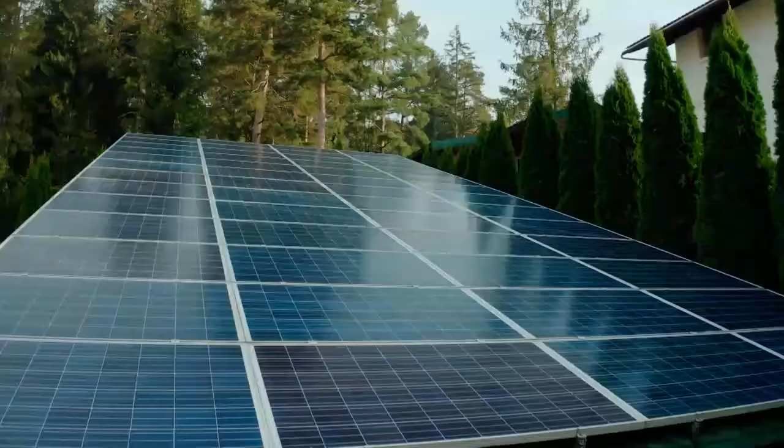This is a key project to reinforce construction in Chile, and it is a very important initiative to encourage the different construction systems in terms of infrastructure. We trust that our alliance will push every new company in the market so that the country can move forward to sustainable solutions. These kind of initiatives are necessary to progress towards a zero emissions economy. This is why I wish you the best of success with this innovation park.

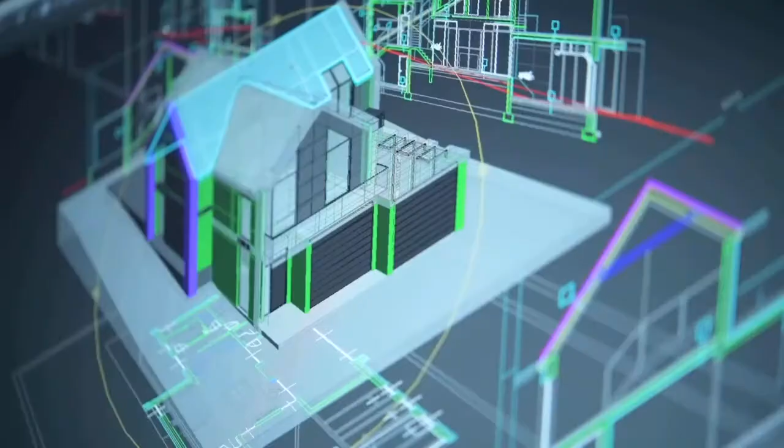As rector of the university, we are part of this initiative, and from the south of Chile we are ready to start this piloting in the university that will boost constructions in the southern part of the country. The combination of the expertise of academy and the connection with the environment and its needs, adding to the active collaboration of the main agents from the region in the sector, will open growth possibilities to innovations, always with a local point of view, because from regions we have a great contribution for the development of the country that everyone yearns and needs.

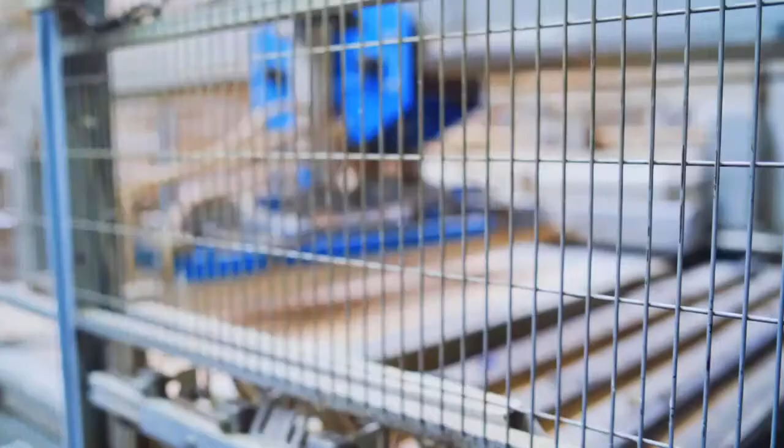One of the keys for the development of the future of this activity is application of technology. We need to manage to use these progresses focusing on our human capital. This is why it's a thrill to attend this launch. Without a doubt, this innovation park will mark an important landmark in the future of construction.

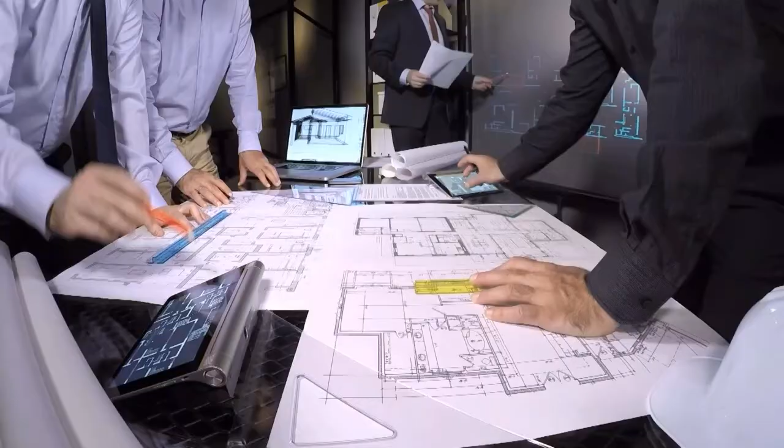As the Chilean Construction Chamber, we look for new spaces for innovations like this park. We hope that this is just the beginning and that many other companies can join this alliance. We are very proud to be a part of this space, and we hope that from now on this initiative will potentiate construction. Congratulations on this landmark, and let's hope that this is a space for dialogue and creativity that will remain in time.

Muchas gracias por sus palabras. Thank you very much for your words.

Pablo Terrazas, the British ambassador, the rector of the University of La Frontera, and the president of the Chilean Chamber of Construction. We would also like to welcome Francisco Martinez, Dean of the Mathematical Sciences from the university, that has just joined us in this launch.

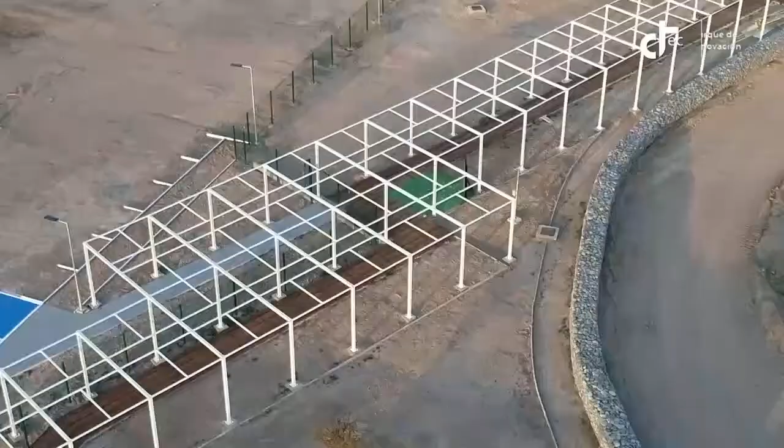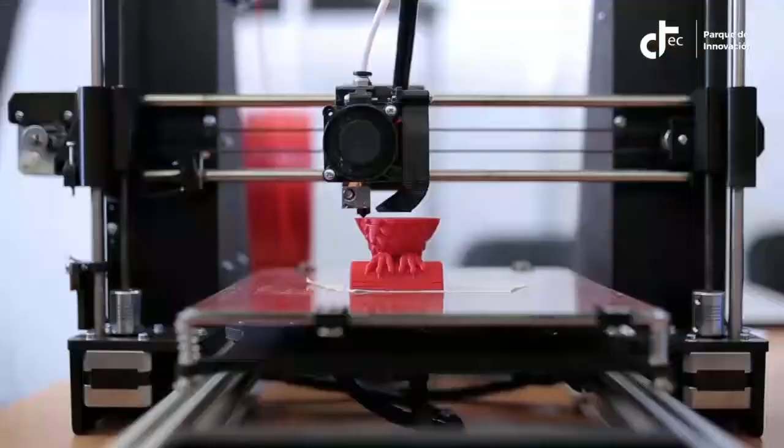If we want to change the way of building and living in the cities, we need innovation. Innovation doesn't come by itself, it's part of a collaborative group.

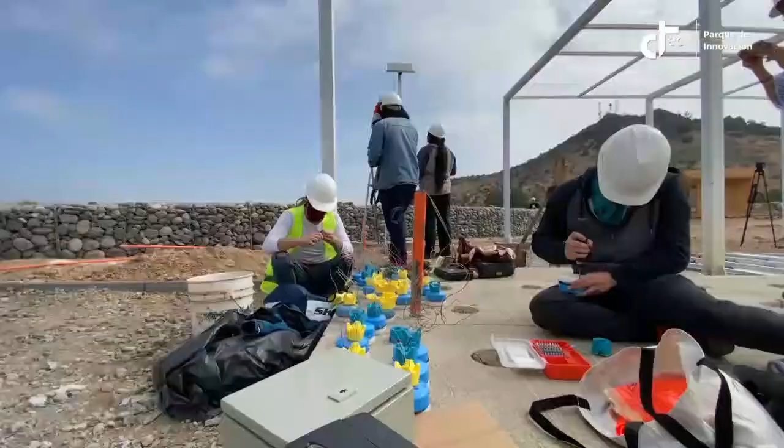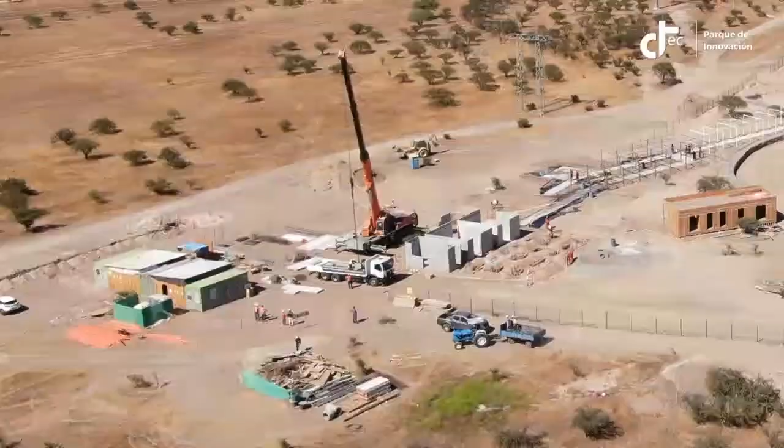We are very happy to put this park at your disposal. This is a place of meeting and construction where top-of-the-edge technologies will converge.

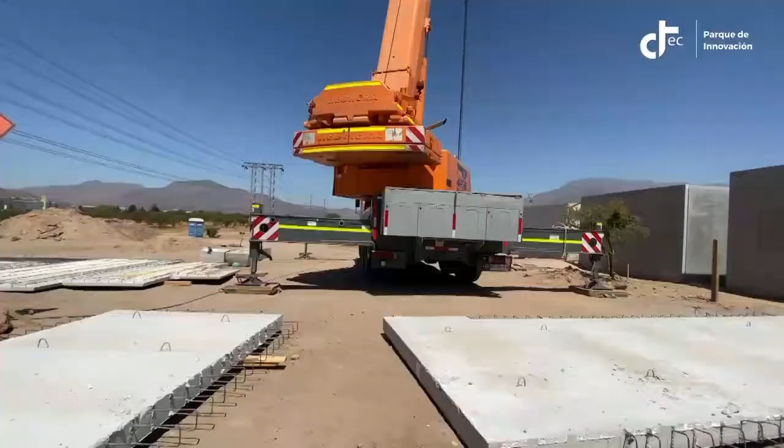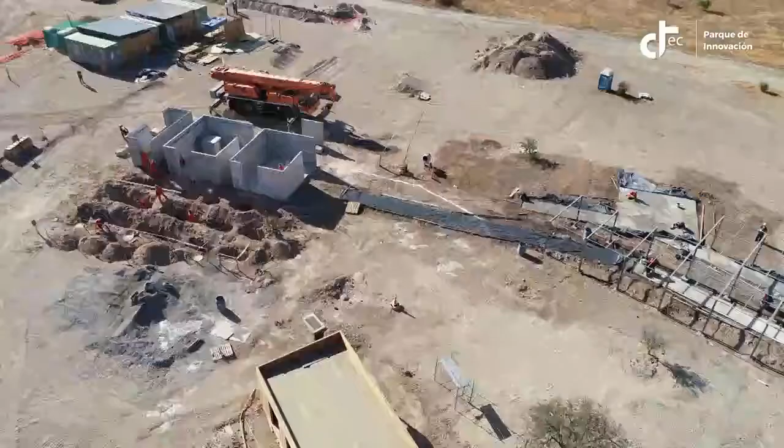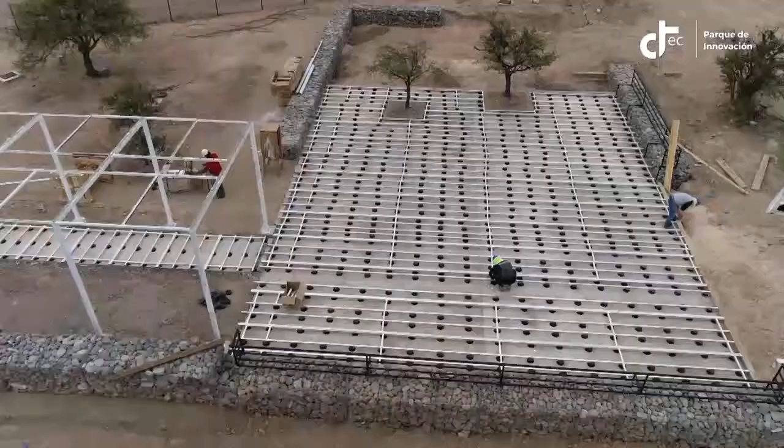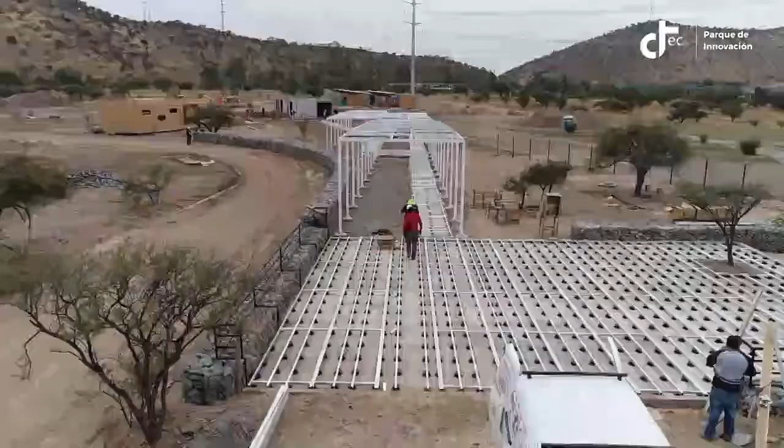Here, companies can do pilots, monitor and test, validate different solutions, new materials or new processes in an integrated way. What we want to do is improve construction systems, incorporating new technologies and innovating in the processes. This is very important to maintain a more efficient construction. Construction, as many other sectors, needs to adapt in light of technological improvements, trends, and better managing of energy and any other relevant aspect that can be tested here in this park.

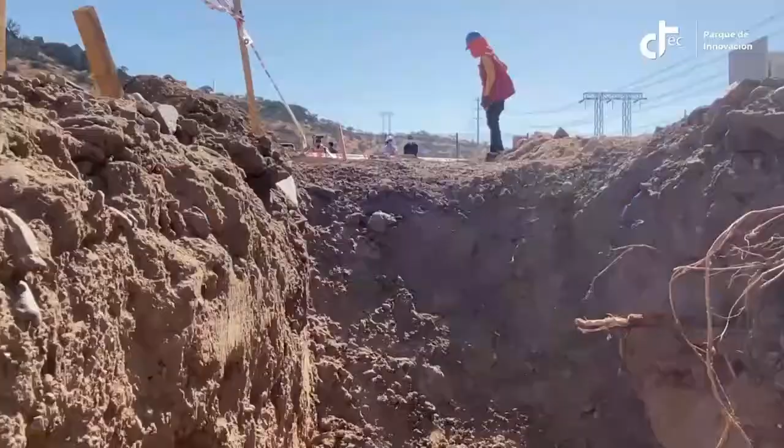This CTeC project is a great example because every protagonist is combined: universities, the government, private companies, and international entities. They are the protagonists that we want to invite.

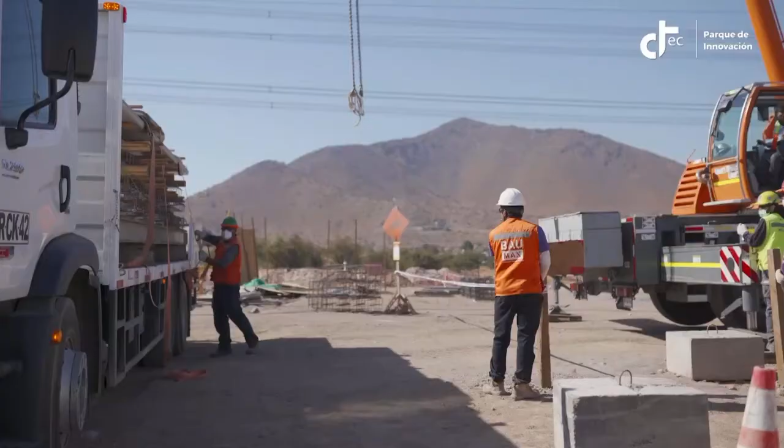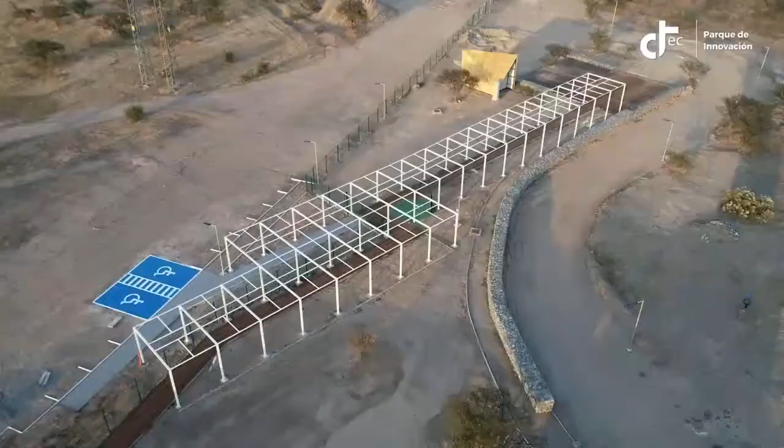The Innovation Park of the CTeC is inspired by the idea to generate instances of collaboration between companies. Here's a mix of solutions. We have more history, but we also have other solutions with different startups and new entrepreneurs that we have a chance to test and try out.

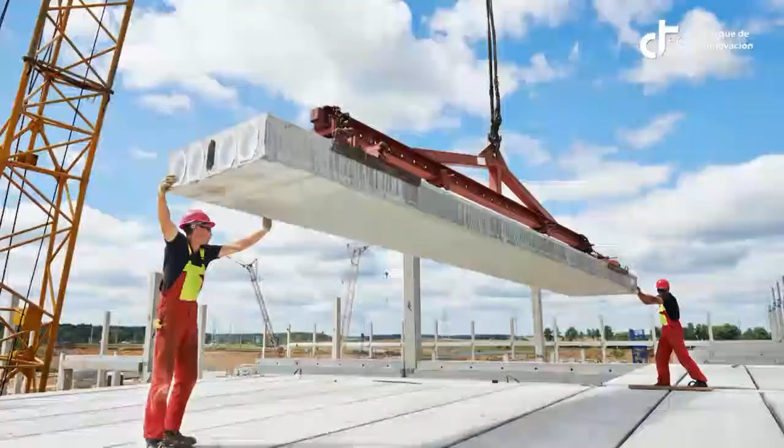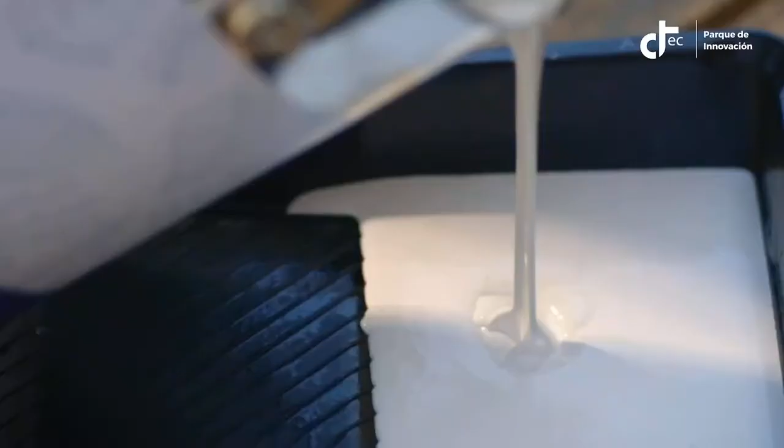The park will allow the development of many products on a national level, developed here in the country. When we have initiatives like this in one place, you can see innovation, connect with the company, and bring knowledge, which allows gaining more visibility on this sector that is strongly growing, and hopefully every company can take advantage of. We invite you to be a part of this change of the industry, and this is the best place to do it: our Innovation Park.

Through the Innovation Park, CTeC seeks to shift the paradigm, driving collaboration and innovation of different stakeholders regarding building. It presents an opportunity and an invitation to rethink the way we're working on projects, with the aim of making processes more efficient and obtaining better results in terms of productivity and sustainability.

To know what the Innovation Park is about in depth, the associated services, and the opportunity it represents for companies in the sector, I'd like to leave you with Carolina Briones. Carolina is an architect from Universidad de Chile, expert in implementation of BIM methodologies, and currently executive director of CTeC. Please go ahead, Carolina. Thank you very much, Jess.

Thank you to all the authorities present today and to the attendees today. As the rector and Provost just mentioned, it is a very important day for us, and I'd like to convey how pleased we are, everyone that is connected today on the day of launching the park. I'd like to also thank the entire team of CTeC that has worked on this, who may not be visible on screen today, but for their great effort, along with everyone who has seen the value of the park and who has collaborated for us to be present today.

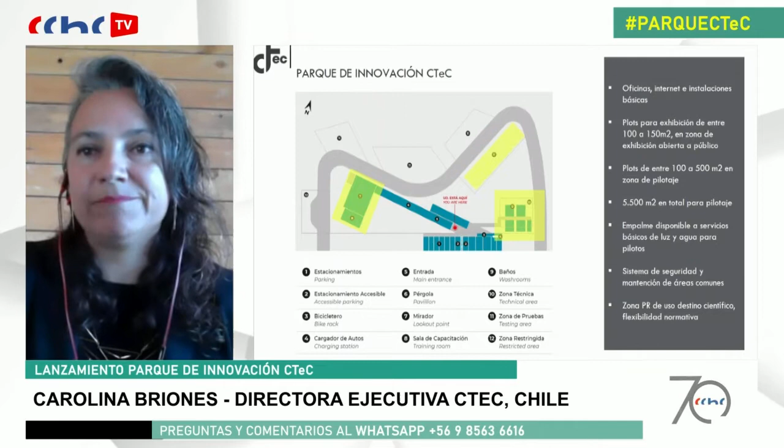How will CTeC accompany the companies that are part of the park? We're offering a service and accompanying them in prototyping and piloting of solutions at real scale and in real environmental conditions. As CTeC, we will offer services to sensor this and measure everything, to see if they have hygrothermal, acoustic conditions, everything in place.

We will generate reports, and we currently have the privilege of telling you that we have a follow-up platform developed together with a member company, Velocity, which allows us to follow in real time the sensors and reportability of what we're measuring in our pilots. This is the first digital twins platform here in Chile. Everything will be sensored through artificial intelligence, and in real time we'll be able to see the performance.

In addition, CTeC and the Innovation Park will offer instances for showing annual events, where technicians and professionals can visit and showcase technological solutions. We will also be producing training to the extent the customer needs, because it's that important. One of the gaps detected is the need to strengthen the capacities of labor, technicians, and professionals regarding these new disruptive technologies, industrialization processes, and all the new processes we need in our labor.

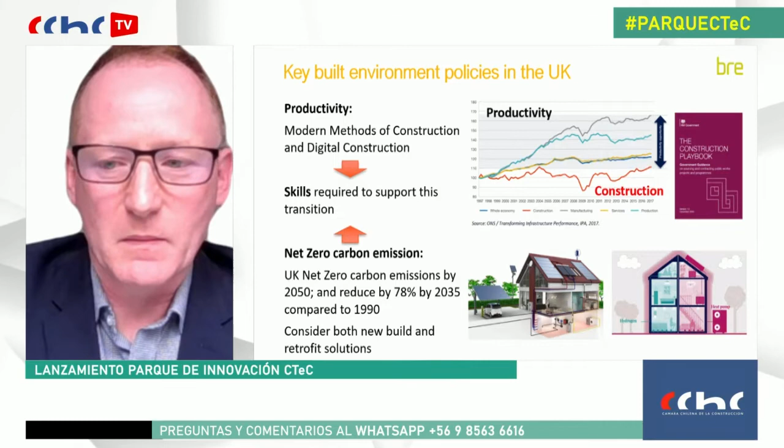I'm just trying to share the second slide for a moment. Sorry, my screen isn't moving. I'm just going to try and change. Don't worry, we'll wait for you, Martin. Okay, 1 second.

Apologies for the delay. The Construction Innovation Hub is an example of a significant UK government programme to improve productivity and also quality and better environmental and social outcomes.

BRE is one of the partners on this programme, together with the Manufacturing Technology Centre and the Centre for Digital Built Britain in the UK. The programme will help provide better performance outcomes through value-based decision-making. This will help optimise the outcomes rather than focusing on the lowest cost solution, as is often the case.

Advanced manufacturing methods are being used to develop a more standardised kit of parts that can be reconfigured for different building types. At present, there are many different approaches to off-site manufacturing, and the lack of standardization makes these solutions difficult to deliver at scale.

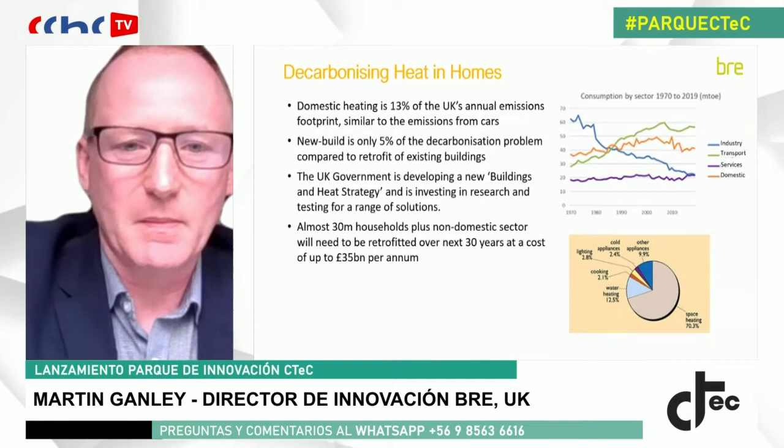Thank you very much, Martin. The truth is that it's quite impressive, all the advances, the focus you have, your approaches. I believe that one of the key concepts you showed today has to do with standardization, and I believe that's one of the actions we will conduct with many initiatives: to standardize the way of working. Thank you very much. Definitely, we will.

We will continue with our second guest, Laura Tordera, leader of innovation at Ferrovial Construction. We're pleased to have a woman invited to our panel today, showing proudly how representativity of women is growing in the business. She's responsible for corporate strategy in the area of innovation for the different geographical areas where Ferrovial works in the construction industry. We've known her way of operating closely, and we've seen the innovation of Ferrovial at an international level, because we know the projects in Chile and we work with you.

We know that historically you've had a close relationship with an international partner like Tecnalia. Could you maybe tell us, Laura, the benefits you've been able to capture throughout these years in this public-private relationship between Tecnalia and Ferrovial, and how a company like yours can reap the benefits of receiving the accompaniment of a technological center such as our center here in Chile.

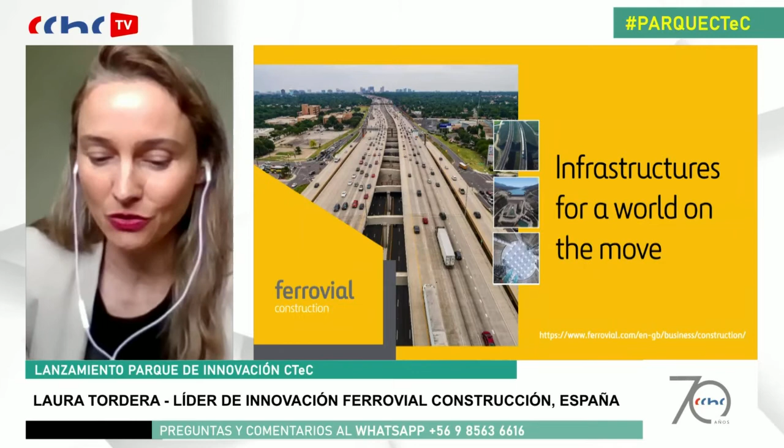Regarding the question you asked me about our collaboration, for example with Tecnalia: this collaboration is part of our open innovation strategy, which has been commented on, and it's the idea you have for your park. For us, collaboration through open innovation is critical because we work with the best specialists in each area we want to develop. It's critical to have collaboration with different stakeholders in the construction ecosystem. I believe the park can be a great opportunity to strengthen these collaborations and drive them between different entities.

Regarding Tecnalia, it's one of the most important technological centers in Europe, and for us it's a fundamental partner in the development of all our initiatives. We have a very close relationship with them and collaborate on different initiatives. We have projects with many more partners funded by public entities, and we have individual projects and developments we want to conduct within Ferrovial, where they help us. We have technical issues at our work sites that we don't know how to solve, and then we go along with Tecnalia. We also do market studies and state-of-the-art research.

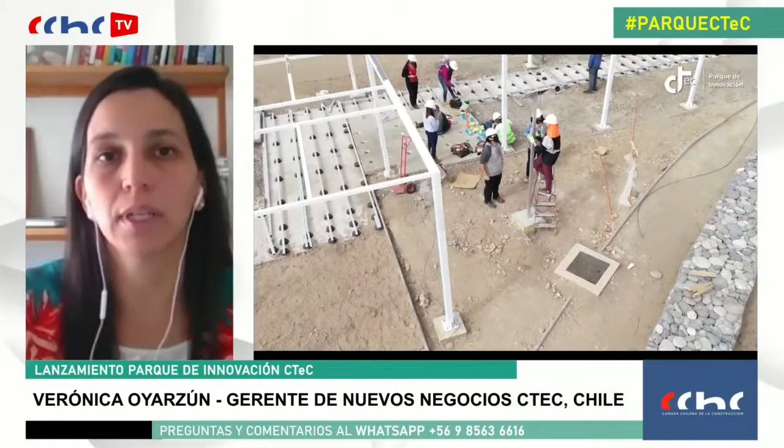We're also watching the example of the house of water. This is a house from a construction company, and they asked, what if we tested what happens with thermal inertia in a dwelling when incorporating water into our panels? We did the whole accompanying process, first testing in the laboratory, and then we moved this to the park.

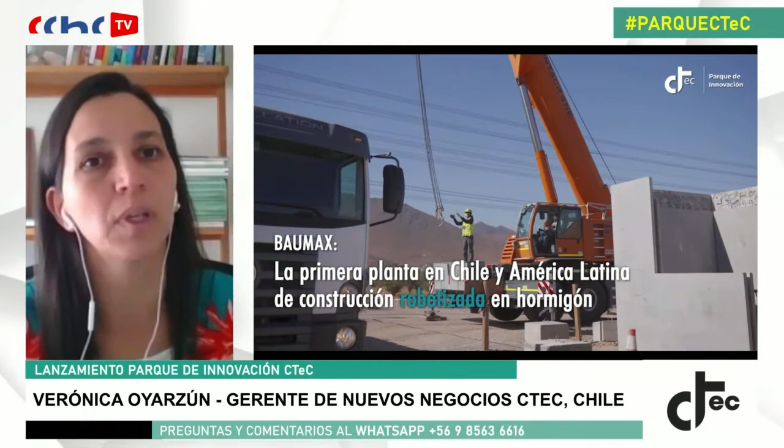We finished the sensoring in two weeks. We gave the first report on how we can improve the thermal conditioning inside, having a curve with a peak temperature outside of 30, lower of 5. Inside, we never increased beyond 25 degrees, and we never went lower than 15 degrees.

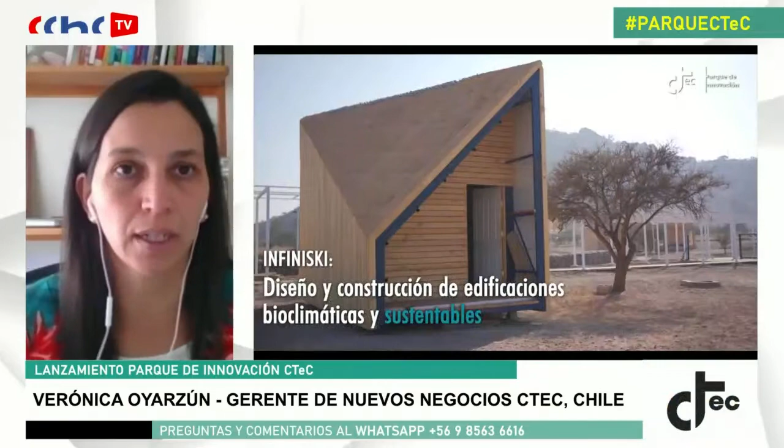So now we're looking at other analyses that we could make, and we're going to progress with them throughout a whole year that we expect to have at the park.

The other example that we can watch on the video is the Baumax case. This is a national company, one of the first in robotics and prefabricating systems. With them, we saw the opportunity of testing different solutions that they were already considering as an option, but clearly they could not test on site.

So here we tested different unions, different matchings, different solutions, different foundations, and also different configurations of the tiles. We realized, and they realized during the design process, that some weren't possible, so they were discarded. Others were tested on the field, on site, but maybe weren't ideal to put in a facility. So this was an experiment in our own facilities, and they gathered knowledge and learnings.

We have tech ideas in companies that recycle polyethylene. It's a huge residual material from construction sites, and we are building parking lots for the park with that.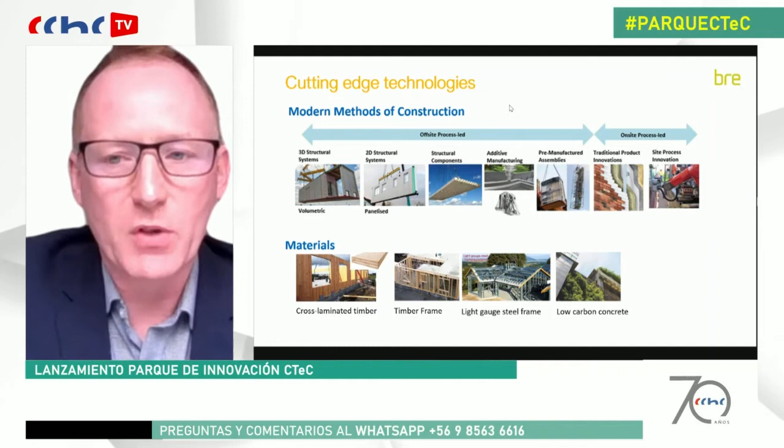Volumetric construction uses three-dimensional structural systems which have been produced in controlled factory conditions. These volumetric units can be brought to the construction site in different forms, including just a basic structure, or including external finishes and services already installed.

Panelized or 2D construction uses flat panel units for basic floor, wall, and roof structures, which are assembled on site. There are also other approaches such as additive manufacturing or 3D printing, and improvements to traditional on-site methods and processes.

There are many innovations in the use of materials also. Timber can help improve sustainability and can be used for timber frame buildings, for example. Its strength can be increased through the use of cross-laminated timber, and sustainability can be further improved where locally grown timber is used.

Some buildings use light gauge steel frames for residential and light commercial structures. Its lightweight nature means it can be transported to site easily and can help reduce the load on foundations and reduce carbon use.

There has been considerable research and development to create low carbon concrete, as this is still a very useful material, but traditionally has a high carbon content.

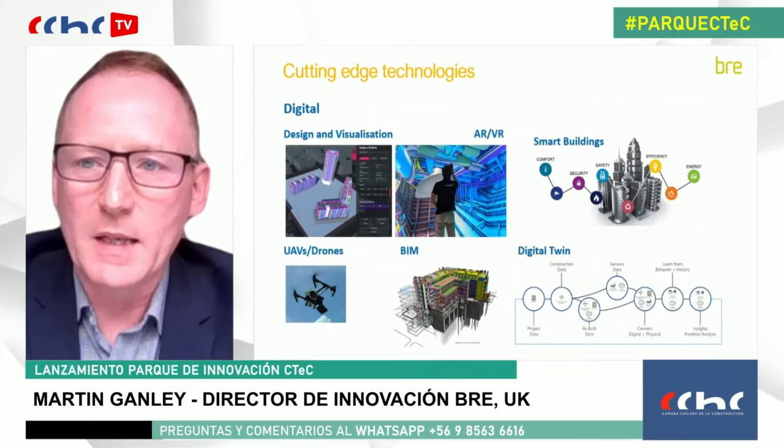There are a range of energy and low carbon solutions for buildings, for both new build and retrofit of existing buildings. Insulating the fabric of the building is key, including the walls, floor, and roof, as is ensuring the windows are highly insulated. Regulations continue to place stricter conditions on insulation, and products continue to improve their performance to meet these changing requirements.

More innovative materials include phase change materials, for example. When the building is warm, they can store heat and release it when temperatures are lower. They can therefore help maintain a constant internal temperature and reduce the energy use of the building.

There are a range of key energy generation technologies which are seen as important in the UK for housing. These include heat pumps, solar photovoltaics, district heating, and hydrogen.

Heat pumps provide energy efficient heating and cooling and are one of the most effective technologies available at the moment to decarbonise buildings, including air source and ground source heat pumps. These produce heat at lower temperatures than traditional gas-powered solutions and work most effectively with large surface area radiators and underfloor heating.

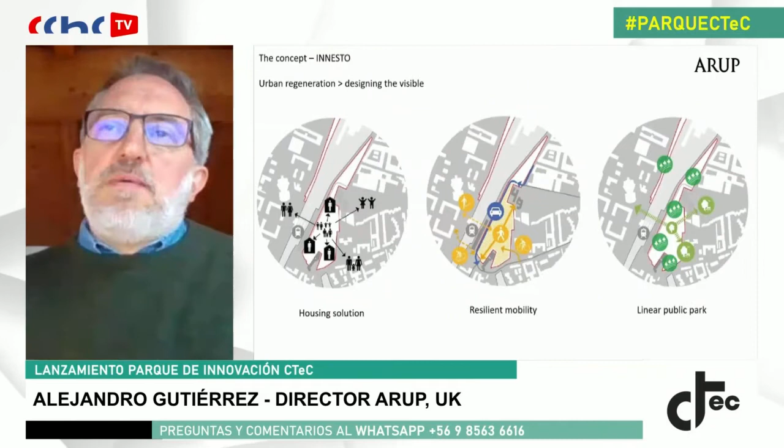Here we have the urban part and concept, which I will not go into, but I will discuss the mixed activities, because it has to do with the type of services that the contest requires, generating services in situ and generating services that are proper for a reduction of emissions, which we will go deep into in this presentation.

And from the standpoint of uses, this allows the context to generate a reduction of trips. In this case it's a small lot, but its location provides great accessibility, and we will speak further about this in a second.

Here we can see how the three main principles of the project are becoming real in different specific interventions. Nowadays this project is in the construction stage. We have three great principles: zero emissions, and a long-term project of 30 years.

The creator of the project is a fund with a social function called Investire, which does projects on social housing and keeps going for up to 30 years. It receives subsidies from the public sector and from users, from the rent of the apartments or commercial sites. On the other hand, it generates an inclusive community, somehow guaranteed by the controlled renting features and the kind of users. So how do we achieve this?

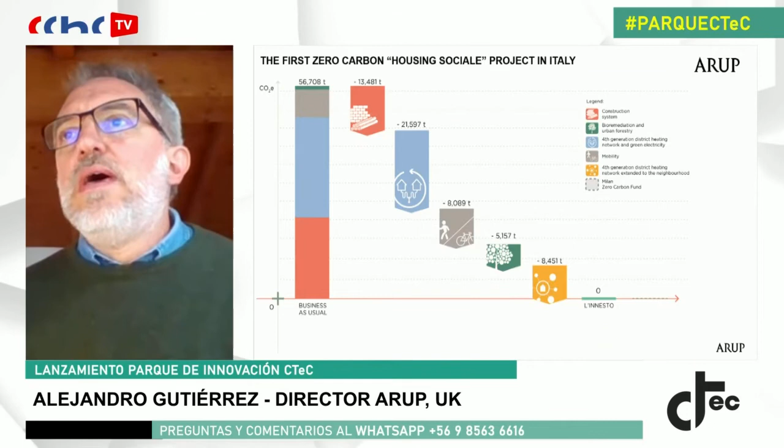And also the component of mobility. We can also go into further detail if you want to know how this district feeds on energy and how it works. Here we have a set of components.

And recovery of energy, I would say that this is innovative in the practical sense. Maybe in the last 5 years we've seen this in a more distributed way on projects, the topic of heat recovery, especially from the water from the sewers.

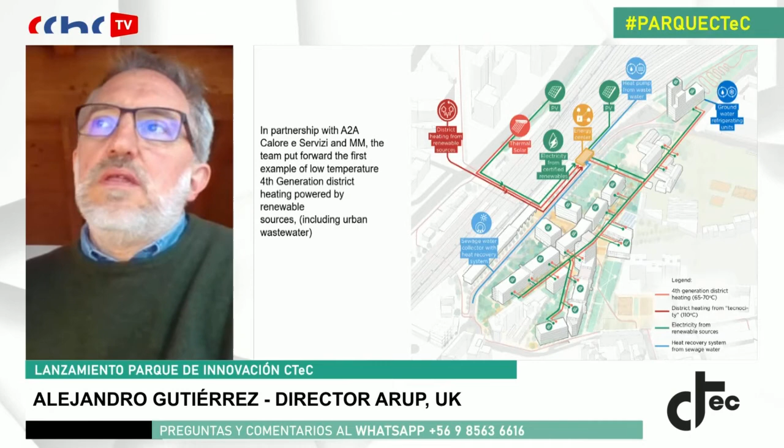This water provides a base load to save energy from other sources. That is the logic, that this is combined in a low temperature network with the district network that comes from this factory. This allows in some way creating continuity of the service, and it is very cost effective for the investment of capital and innovation of all this development.

Here are some specific descriptions in terms of the uses. For example, 1,200 meters for urban farming.

And before closing, I would like to show you this slide that's very similar to what Martin showed from BRE. And here what was decided with a specific supplier was to create a mix from what I showed you before to decrease energy with the materials. This is a structure, double drywall sheet and recycled materials, and this is combined with CLT on the ceilings and on the walls.

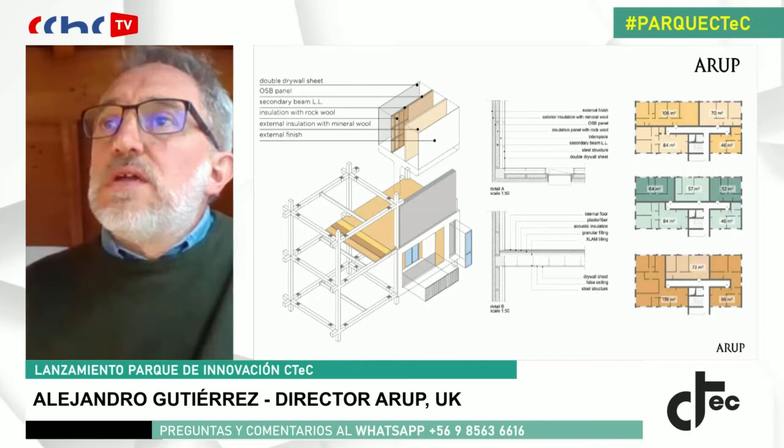So we generate, in the case of what is going on in Milan in 2019, when this project started and when it comes to its design, this was the most appropriate from the point of view of reduction of energy associated to this project and to these dwelling units that have a life cycle that Investire is investing.

With this I would like to finish by saying that the critical thing here, the message I would like to give, is that innovation associated to construction industry requires time, requires processes and public policies that support it. But I would also say that from the last 5 years, including what I said before, there has been some maturity and a certain update.

From technologies, processes, and there is a familiarity for the real estate industry. There's a clear trend in the finance market from the green financing point of view that allows us to think that we are on a correct path, at least from Europe.

It's a clear message for Chile, because products usually come from other places, but the trend is to access these kinds of funds. In the case of Chile, international funds that are investing in Chile, and in the living and dwelling housing industry is gaining more strength and requires these kinds of approaches for construction projects.